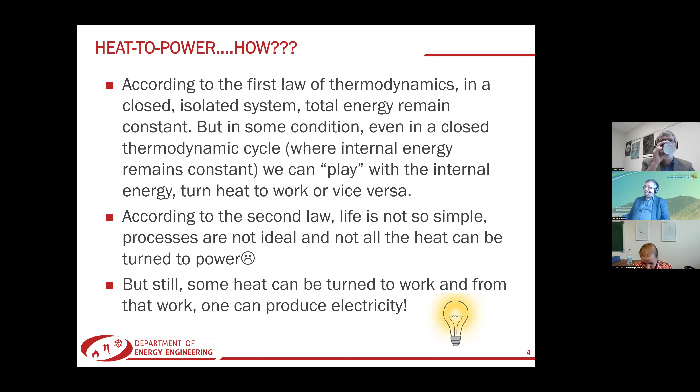Usually I tell my students that we are very lucky, because from the four laws of thermodynamics, we need only two. According to the first law, we can play with work and heat, because only the internal energy has to be constant in a closed thermodynamic cycle. So we can turn heat to work or work to heat, depending on what we have and what we want. But the bad boy, the second law, says that life is not ideal, so not all the heat can be turned to work.

Therefore, we have to figure out how to turn more and more heat to power. And if we can do it, we can make some electricity, which is very good. When we are using thermodynamic cycles, the best way to do it is by using temperature-specific entropy diagrams, because it's a very easy way to calculate the heat.

In this figure, you can see the traditional Carnot cycle. Carnot cycle has 4 steps. It's a gas cycle. First, we have a compression cycle. During the compression, the gas temperature will increase. If it's fast enough, then we can do it adiabatically, so the entropy is more or less constant.

Then we are reaching a high temperature, high pressure state when we are adding heat to the system. But for some reason, Carnot decided that it should be done in an isothermal way, so heat addition without temperature change. After adding a sufficient amount of heat, we can turn some part of this heat to work using an expansion device. The expansion device will expand the hot, high pressure gas, and we will have cold, low pressure gas, but there will be some remaining heat in the system, which has to be removed. So this unused heat has to be removed from the system by a cooler.

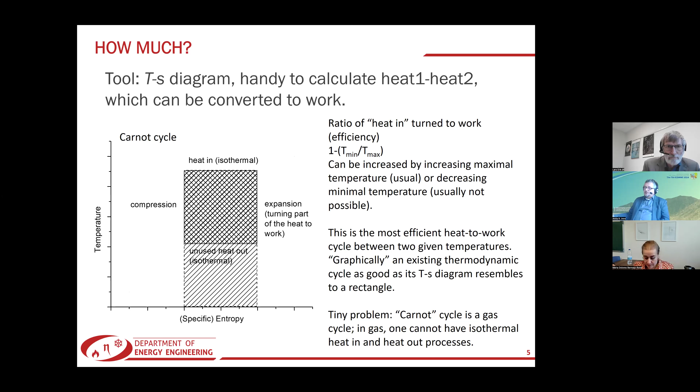But it also showed us that the best way, the highest efficiency, would be to use some thermodynamic cycle which graphically resembles a rectangle. It's very easy because even if you draw some crazy thermodynamic cycle, you can easily see whether it's rectangular or not. The Carnot cycle would be perfect, but the problem is that in a gas cycle, to achieve isothermal heat addition is quite difficult.

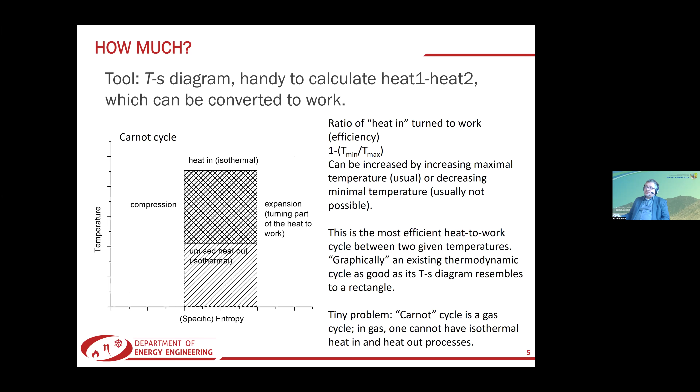Let's say it's more or less impossible. Therefore, we have to figure out something. Let's keep the working fluid as the gas. What can you do with a gas? Of course, you can do adiabatic compression and adiabatic expansion, but the most simple way for heating or cooling would be an isobaric way.

So therefore, the easiest gas cycle would look like this one: first, adiabatic compression, then an isobaric heating, then an adiabatic expansion, then the isobaric cooling. This is the so-called Joule-Brayton cycle, specifically the closed one, which is using external heating.

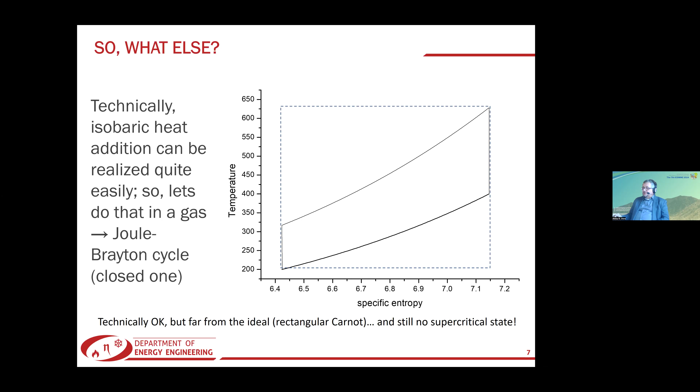If we put this Carnot rectangle around it, we will see that the rectangle is much bigger. The area within the Joule-Brayton cycle is no more than 30% of the total rectangle area. It means that we are not utilizing all the heat that we could. And well, we should do something about it.

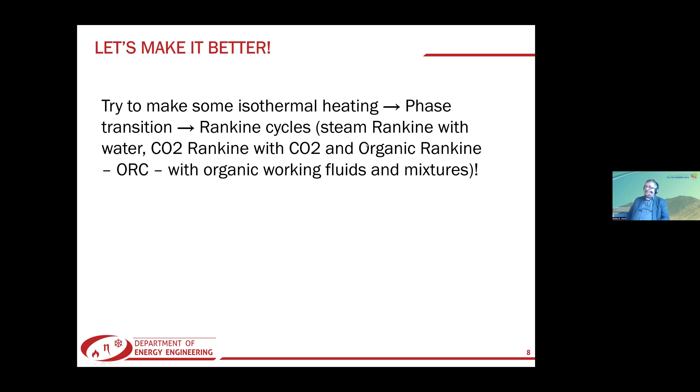We have to figure out how to make isothermal heating. And of course, you can make isothermal heating if you try to use some phase transition in your system. So you have to use some liquid working fluid, which is liquid at low temperature, heat it up to get steam or vapor. With the phase transition, you can get isothermal heating parts and isothermal cooling parts. This is the so-called Rankine cycle.

The traditional power plants are using the steam Rankine cycle. There's also some carbon dioxide Rankine and the organic Rankine cycles, which are using various organic fluids.

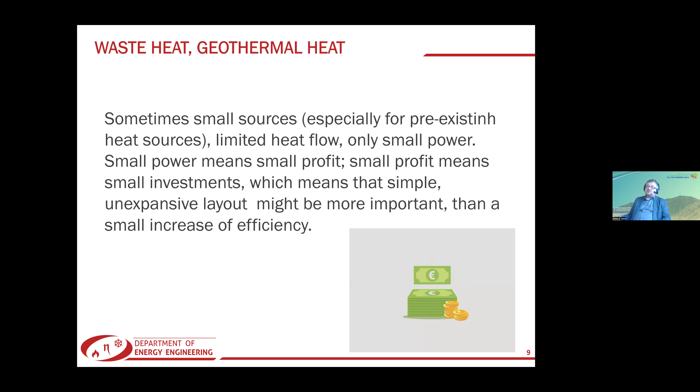There is an additional problem. It is especially serious when you are using the so-called pre-existing heat sources, which is waste heat or geothermal heat or whatever, because in a nuclear power plant you have plenty of heat. But in a geothermal well, you have only a small amount of heat, which means that from a small amount of heat, you can generate only small power, small profit. Small profit means that you have to make your investment on a very low level.

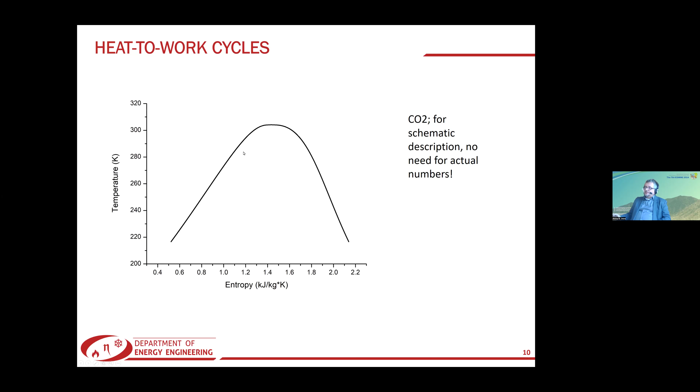It means that your device, which will realize the thermodynamic cycle, has to be as simple as possible. Let's see this carbon dioxide TS diagram - let's make it schematic because it's not important that it is carbon dioxide. In the TS diagram, you have the liquid part on the low entropy side, the vapor part on the high entropy side. Below the bell curve, you have the mixed liquid and vapor region. And somewhere up, you have this high pressure supercritical region. Let's try to make ideal cycles in the first step.

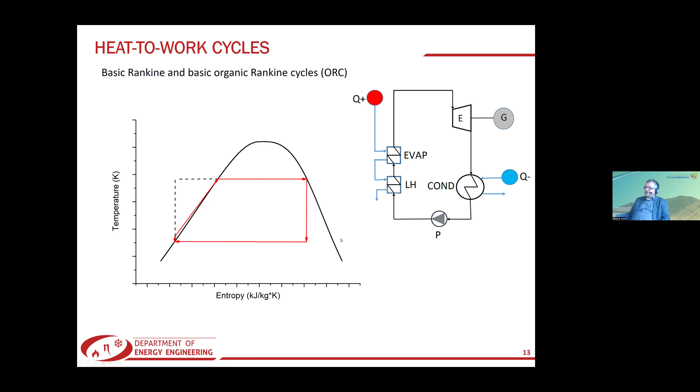Also, I put this Carnot rectangle. You can see that it's quite nice. So it would be a good device, just it seems to be a little bit too expensive.

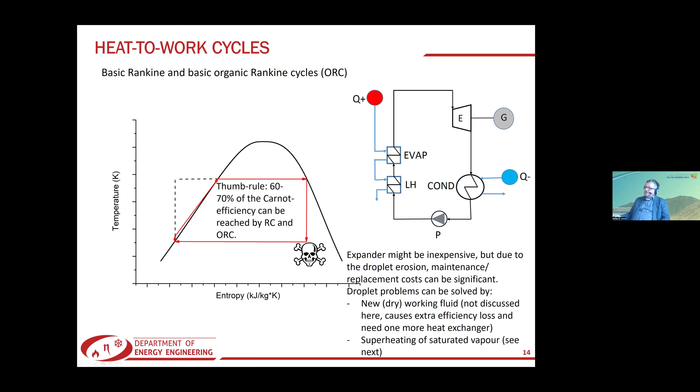There is another problem. I said that upon the expansion, we will end up in the wet vapor region. Wet vapor region has a lot of tiny droplets, and the tiny droplets have quite big speed. And if, for example, you are using a traditional expander, which is a turbine, then the turbine blades will be damaged by these droplets.

Therefore, it's not so good to use this kind of expansion. What can we do? We can simply superheat the whole system. So instead of starting the expansion in the saturated vapor state, we can heat up the system. Pressure is still not so high. Temperature is already quite high. And you need a third heat exchanger, because in this case, you are heating up a vapor, pure vapor, so there will be no phase transition like in the evaporator, and therefore it has to be a different device. So even this total system is a little bit more expensive.

And then if you compare this superheated Rankine cycle with the big rectangle, because now we have to draw the rectangles always at the maximal and minimal temperature, you can see that the efficiency compared to the potentially best Carnot efficiency is even smaller. So we are on the wrong side. And also we have to make an inventory.

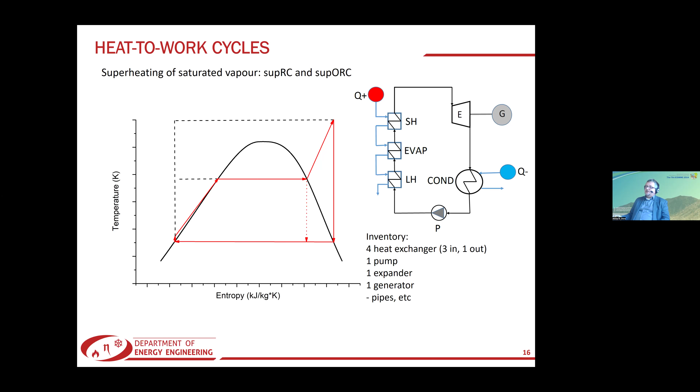We have 4 heat exchangers, 1 pump, 1 expander, 1 generator, and a lot of pipes. We have to remember this, because in energy engineering, it's not the kilowatts or kilowatt-hours that are the most important, but the price, unfortunately.

So here are the problems. Heat exchangers are expensive, pumps have self-consumption. Also, there is something called boiling crisis. It can happen in the evaporator, that on the cold liquid side there will be bubble formation on the hot surface of the heat exchanger, and sometimes the bubbles will not be able to move away, so they form a more or less compact vapor film on the surface of the heat exchanger. Then the heat exchange between the cold and hot liquid will deteriorate, and sometimes it can even cause a steam explosion because there will be some overheating on one side.

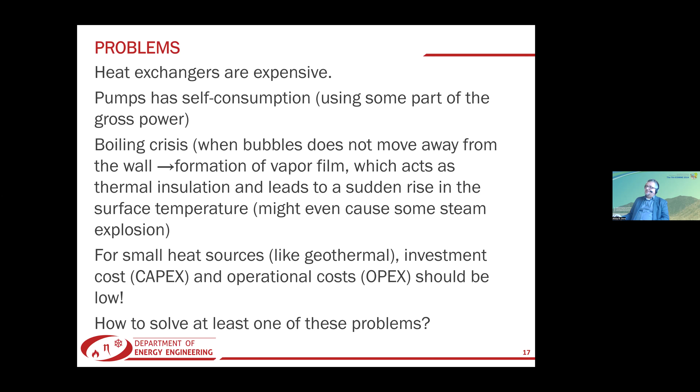Also, as I mentioned, if you have a small heat source, then the investment cost and operational cost should be as low as possible. So we have these problems, they have to be solved, and we have to solve it in high pressure supercritical fluids. The reason is that this is a high pressure meeting, so we always have to find a proper solution which fits into the audience.

So what can we do with supercritical fluids? There is something called transcritical Rankine cycles. You might remember that in traditional Rankine cycles, we had a short compression line, and then we heat it up, and upon heating, the liquid state reached the evaporation state. If we are using bigger compression, then we can go above the critical pressure.

Then by heating the high pressure liquid-like fluid, when the pressure is higher than the critical pressure, you might have heating without boiling. So here it will be some liquid-like, some vapor-like, but technically there will be no boiling, no bubbles. So you solved a lot of problems, because in this case you have to use only one heat exchanger. Well, it has to be more sophisticated than the previous one, but it's still only one instead of three. And you also solved the boiling crisis.

Of course, there might be some other problems. From transcritical Rankine cycles, industry is using more or less only 3 different fluids. Water is used in traditional fossil fuel supercritical power plants. There are several all around the world. Also, there are some plans to build similar nuclear power plants. It is called a 4th generation supercritical water reactor. It will run between 23 and 25 megapascal.

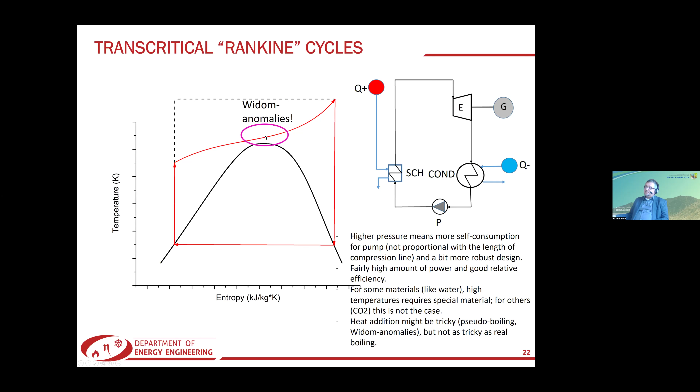The problem is that we will have the so-called Widom anomalies close to the critical point when we are heating up the system at supercritical pressure. What does it mean that we have these Widom anomalies? It means that in supercritical fluids close to the critical point, some of the transport properties might be extremely high. And when you have the combination of these extremely high or extremely low quantities, for example the constant pressure heat capacity, then there can be two different problems, the so-called deteriorated or enhanced heat transfer.

In one case, you cannot remove all the heat you want, and in the other case, you will remove too much heat. The deteriorated case is the bigger problem, because if you cannot remove the heat you want to, for example in a supercritical nuclear power plant, then it might cause a huge accident. And therefore, in supercritical power plants, you have to know exactly the thermal properties.

I said that supercritical nuclear power plants will run at 23 or 25 megapascal, but this pressure will be reached by a pump. And when you are using the pump, the pressure is not exactly 23, there will always be some fluctuation around the pressure. This fluctuation can be even 0.1 bar, so 0.01 megapascal.

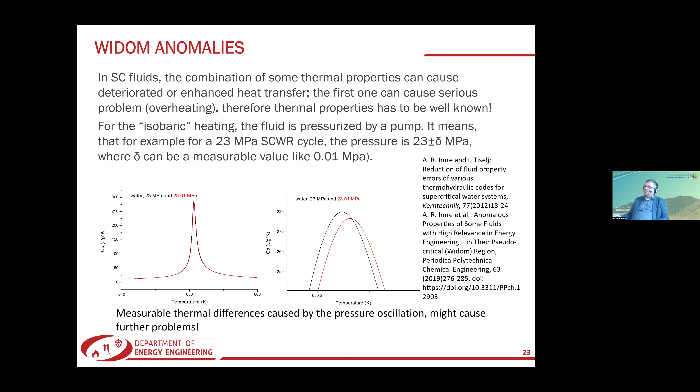And it means that because in the Widom region, these transport thermal properties are very sensitive to the actual pressure, you can have even 2 or 3% differences between them. And it might mean that you just calculated that everything will be okay, but no, because the CP is a little bit higher and you will have deteriorated heat transfer.

It will be very difficult to make very exact calculations for a supercritical power plant, but we have to solve it somehow. Inventory-wise, for both systems, the traditional Rankine or the transcritical Rankine, we still need one pump, one expander, one generator.

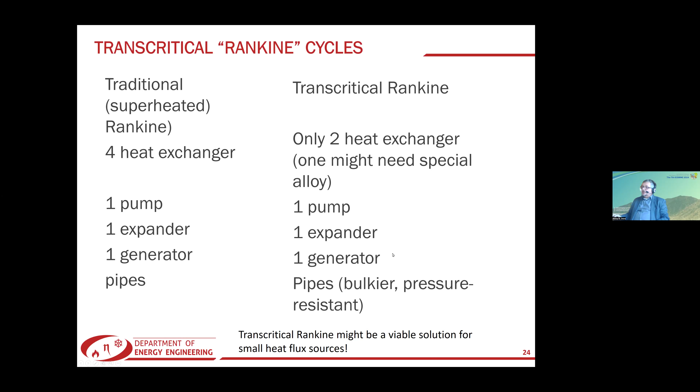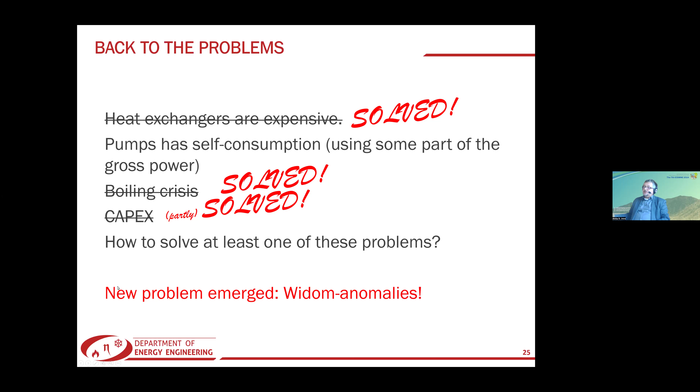Concerning the pipes, the transcritical Rankine cycle is called transcritical because the cooling part is subcritical while the heating part is supercritical. The pipes should be much bulkier because of higher pressure, and we need only two heat exchangers, one for heat addition and one for heat removal. So we solved one problem associated with heat exchange, we solved the boiling crisis problem, and at least partly we solved the investment problem, but we have a new problem with Widom anomalies.

What can be done? In a geothermal power plant, there is a very nice and tricky version. How can you solve the problem associated with the pump? They say, let's put the first heat exchanger, the one making evaporation, below the earth. Not just 10 meters, but 500, 600 meters, down to the geothermal environment, or even to 1 kilometer.

The heating will be done there, and the pressure will be high, not because any pump is used, but simply because the working fluid, which is condensed on the surface by air cooling, turns back to liquid, and the hydrostatic pressure of the liquid creates the pressure of the system. Of course, it's very difficult to make a big power plant like this. There are some smaller pilots existing, but there are two problems.

First, if you want to utilize most of the work coming out from the expander, you have to put the turbine and also the generator very close, meaning the turbine, generator, and evaporator have to be underground at 1 kilometer depth. It's an expensive way. Alternatively, you can put the turbine and generator at the surface, but then you'll have a huge pressure drop between the evaporator and the surface, and also a temperature drop, and the efficiency will be much lower.

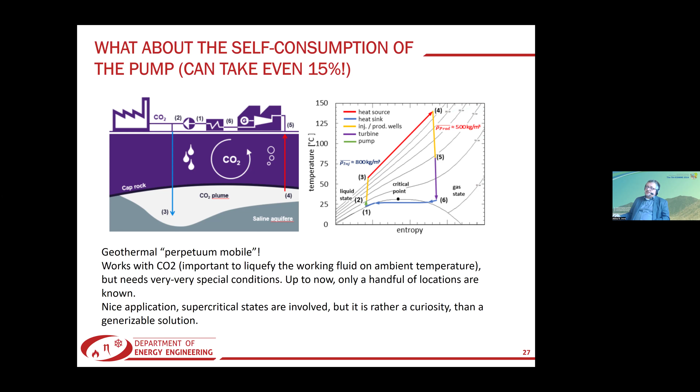The only problem is finding a good location where this thermodynamic perpetuum mobile cycle can work, which is very difficult. As far as I know, there are presently fewer than 10 locations known around the world, and one of them is in Hungary, in Zala County. They already had a one month long cycle, where the carbon dioxide was constantly running around, and it generated something like 200 to 300 kilowatts, which is not a nuclear power plant, but it's a quite nice number.

So here we also have carbon dioxide in a supercritical state, which is high pressure, but not extremely high pressure. In this way, the pump problem can be solved, but the investment cost will be extremely high, so this is not the best solution.

Therefore, coming to the last part, what can we do to have a very simple thermodynamic cycle, a bare-bone thermodynamic cycle, which can turn heat into work? First we have to investigate what are the necessary steps for the power cycle. Because we are converting heat to power, we need a heat exchanger for heating, and we need an expander to turn part of the heat into work.

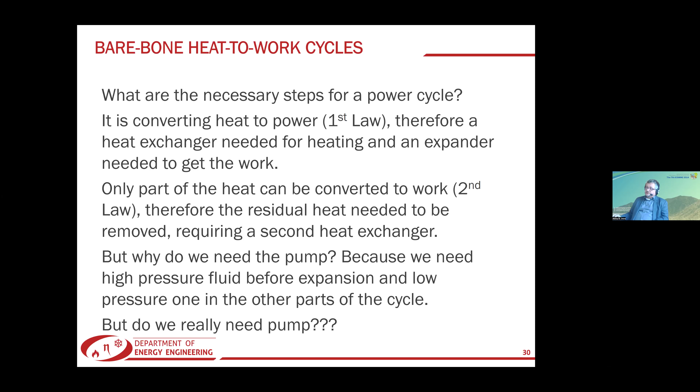We also need a second heat exchanger because only part of the heat will be turned to work, so the leftover has to be removed. But actually, we do not need the pump. Technically, we need high pressure because high pressure is needed to drive the turbine somehow. But why do we need a pump? Can we make high pressure without a pump? Of course we can, and let's see how.

Let's have a temperature entropy diagram just for gas. We have an initial state of the fluid: a low temperature, low entropy gas, and we can heat it up in two different ways, either isobaric or isochoric. Isobaric and isochoric heating is very different.

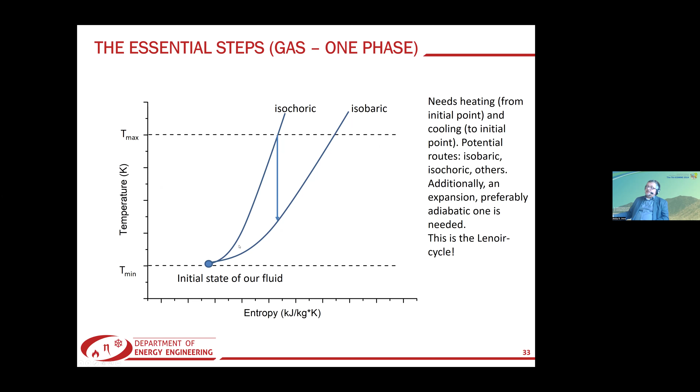Let's say we are using isochoric heating, and when we reach the maximal temperature provided by, for example, the geothermal well, then we simply make an expansion. In this way we have a so-called trilateral cycle: isochoric heating, adiabatic expansion, and then isobaric cooling. This is the so-called Lenoir cycle.

Lenoir cycle is not very good. If you compare it with this Carnot rectangle, you can see that it's really, really bad. Sometimes the Lenoir cycle is still used with internal combustion engines, but only for cheaper devices like lawn mowers.

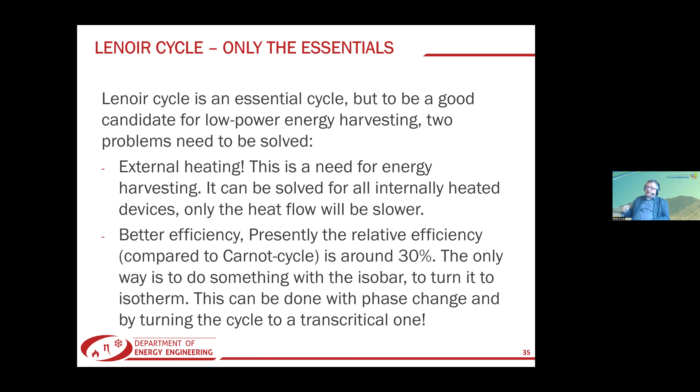What can we do? How can we make the Lenoir cycle better? For example, the first step is that we have to run it with external heating because we have to utilize geothermal heat. And then we also have to make better efficiency. Better efficiency can be achieved if we make one of the cooling steps isothermal, which means we have to do a transcritical cycle.

This is carbon dioxide. First, let's see the black one. We have isochoric heating, adiabatic expansion, then isobaric and isothermal cooling. We had a nice triangular cycle. If you compare it with a rectangle, you can see that it's almost half, so it's not bad.

The problem is that if you are using these numbers, the highest pressure of the system will be 277 megapascal. For your community, it's not big, but for an energy engineer it's extremely big, because even the very high pressure power plants have a maximum of some 20-something megapascal. So it's 10 times higher than what can be reached in industry.

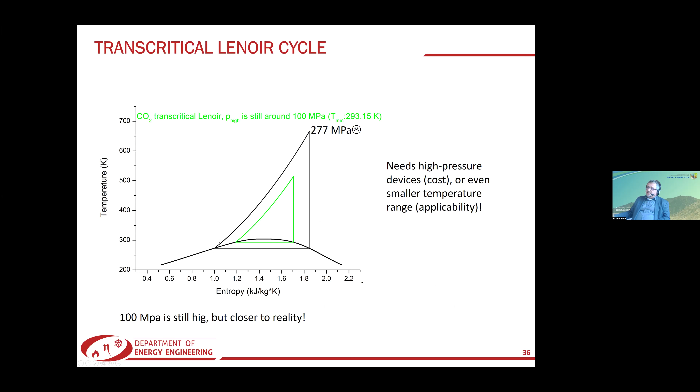And even if you make a smaller triangle, it's still 100 megapascal, so it's still quite high. There are some problems. First, in the market we have a lot of isobaric heat exchangers, but only a very few isochoric ones, which means the prices of isochoric heat exchangers are quite big.

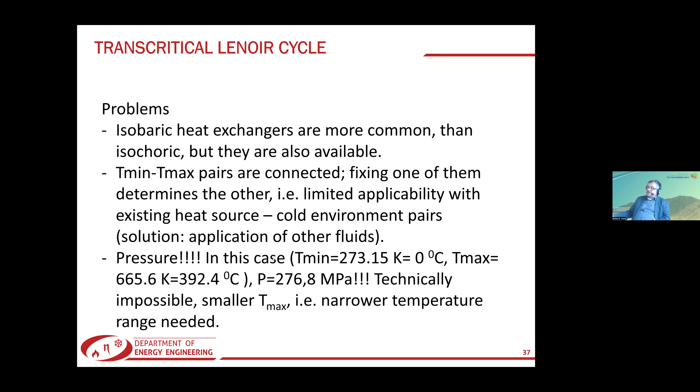As you see here, upper and lower temperature pairs are always connected. So if you have one lower temperature, which means, for example, air temperature, then you can utilize only one high temperature source. If you have another high temperature source, then you will need a different cycle. Pressures are high, as you said, it's a very, very big problem.

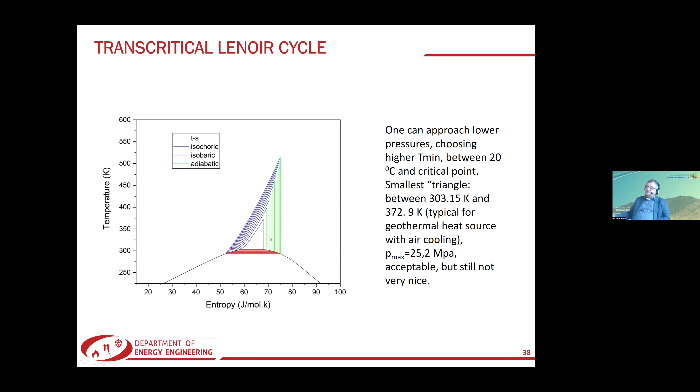Even if you go down, we still have high pressure. Here I have a lot of different triangles, and the smallest one inside is a triangle between 303 and 373 Kelvin. It's very good for a low temperature geothermal well with air cooling, and the pressure is 25 megapascals, so it's at the limit of our potentials. But as you can see, because this triangle is quite small, the power will also be quite small.

We can compare the maximum and minimum temperature pairs. So if you have a geothermal well and you know that the geothermal well temperature is 350, then you have to find a cooling material which can cool it down to 303 Kelvin, and you have to do it potentially at low pressure.

But how can we make the pressure lower? In this case, the second law helps us, because the second law is talking about entropy and all the bad things of the world. It also means that there is no such thing as an ideal isochoric or ideal adiabatic process.

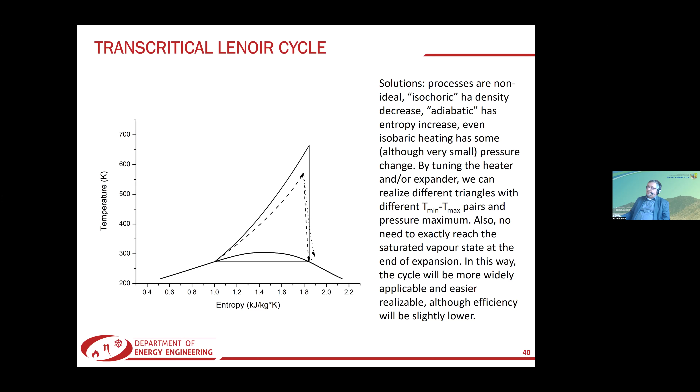It means that if I choose properly my quasi-isochoric heating device or my expander, then I can choose the location of this upper point. This can be here, or even here. So I can utilize more and more temperature, more and more heat sources.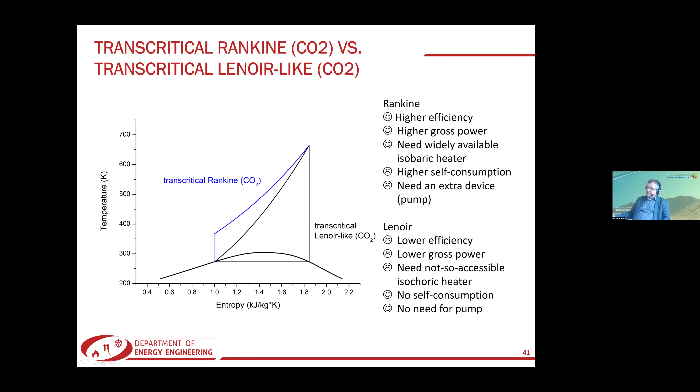At the very end, I hope I still have a few minutes, I just compared the traditional transcritical Rankine cycle, which is also not bad, but has high self-consumption and needs a lot of extra devices, with the Lenoir cycle, which does not have self-consumption and no need for a pump, but has lower efficiency, lower gross power, and also needs an isochoric heater.

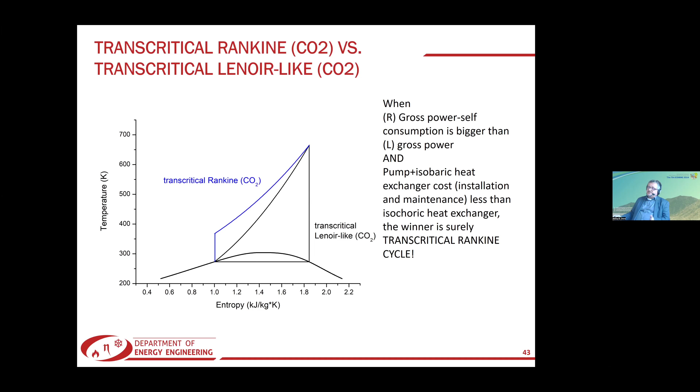So every time you have a heat source, you have to compare the gross power produced by the potential transcritical Rankine and the transcritical Lenoir cycle, and depending on the gross power and the self-consumption, you can decide whether the Rankine or Lenoir cycle would be best. There are occasions when one is good, other occasions the other, but often you have to make very detailed financial calculations to determine which would be best.

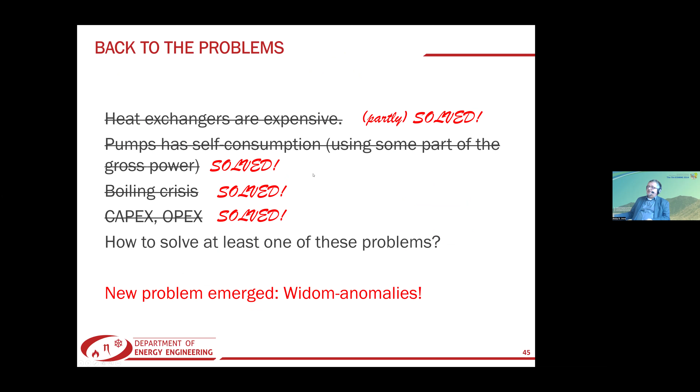With this Lenoir problem, well, we solved almost everything. The heat exchanger is still a little too expensive because we need a special one, and of course we have to handle the Widom anomalies somehow. But it still means that the Lenoir cycle with external heating and transcritical cycle can be a good solution for geothermal and industrial waste heat sources. We can make a few hundred kilowatts, not a few thousand megawatts, but that few hundred kilowatts can be used on spot, so there would be no transport cost for the electricity. It can be a good solution for a sustainable future. Thank you for your attention.

Thank you very much, Attila. It was really exciting. It's great that we are having presentations from different fields and from energy engineering. I'm not sure if it's really something we are all familiar with. We have one question so far, if you allow me to read it.

Do you think that thermal energy can reach significant amounts to contribute to the elimination of fossil fuels? Can you compare geothermal with solar, wind, and water in terms of future alternatives to fossils?

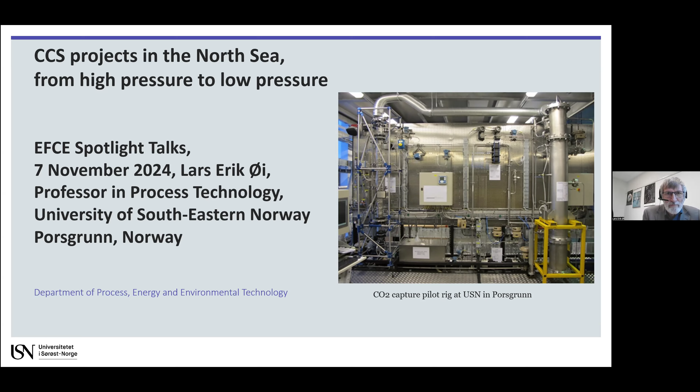We have an absorption column to the left and a stripping column to the right. The absorption is at atmospheric pressure, and the stripping is performed at 2 to 3 bars using steam—low pressure steam—to heat the stripping process. The absorption can be from 1 atmosphere up to 100 atmospheres.

First, a little about CO2 capture and storage technology, and then just a little about the need for CCS. I tried to go a little through the history of early high pressure applications, and that is carbon capture from natural gas. This is by nature cheaper due to no pressurization and also to slim columns. And then I will turn to today's atmospheric applications.

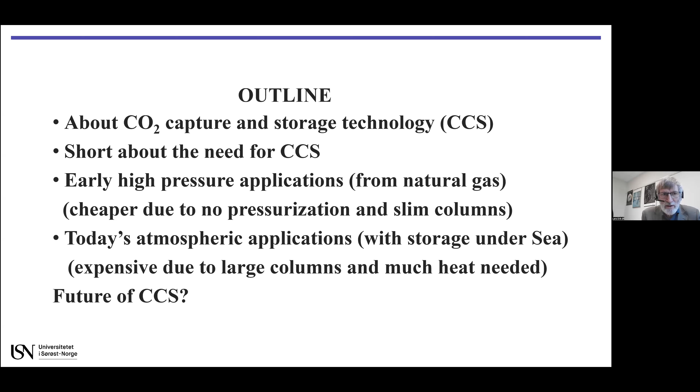We have a large project going on with storage under the North Sea. These atmospheric applications are expensive due to several things, but typically very large and expensive columns and much heat needed. And then I will end with a little about the future of CCS.

A little about the technology—I will only go through CCS by absorption in amine solvents. Again, this process can be performed at a high or a low pressure in the absorber. I guess most of you have seen the outline of this process before, and from a chemical engineering point of view, it's perhaps one of the most common processes, with absorption followed by desorption or stripping.

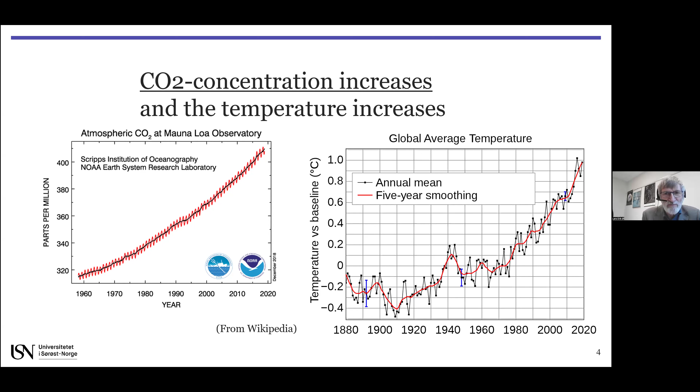About the climate, I will only state that the CO2 concentration in the atmosphere increases and the temperature increases. We are soon approaching 1.5 degrees heating, and then we have a political international agreement with an aim to limit the heating to 2 degrees. This is an old curve.

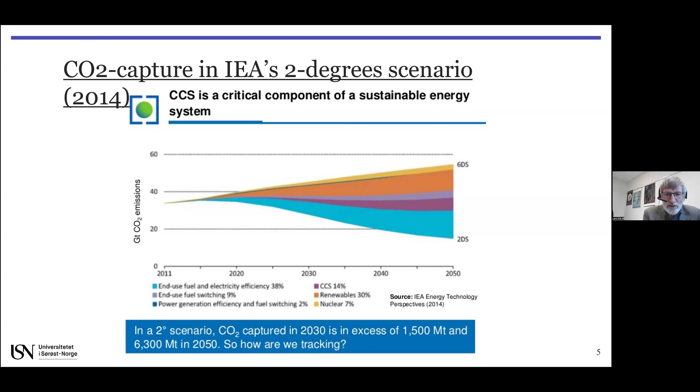It is indicated here that CCS will stand for 14% of the remedy. If we look at the timeline, we are now in 2024, and now we have to start with large-scale CCS applications to reach the 2 degrees level limitation. I'm afraid that we are late, but from the process engineer side, we definitely have a challenge here, and we want to take the challenge. I think that CCS will have an important part in the limitations of the temperature increase.

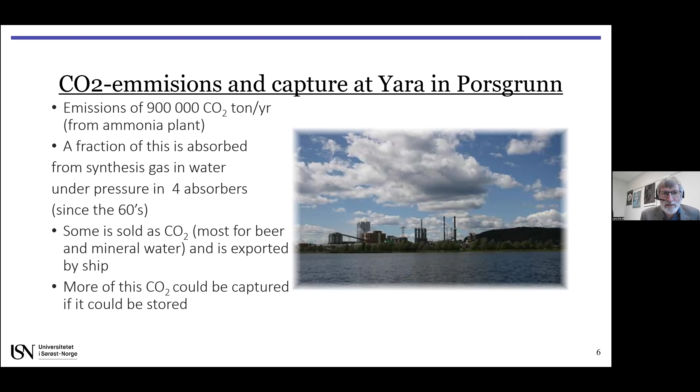In the 60s, this CO2 was exported, and some is sold as CO2, mostly for beer and mineral water. There has been a long-lasting export on ship. More of this CO2 could be captured if it could be stored.

Then we go out to the North Sea, and this is about CO2 capture at the Sleipner field. The process of processing the natural gas is performed at about 60 bar on the top of the platform. This is below the reservoir pressure and above the pipeline pressure. This process has been performed since 1996.

The reason why they removed this CO2 was due to 2 things. One thing was to reduce the unnecessary transport of CO2 to the European continent, and partly to reduce the CO2 tax. In this project, CO2 is stored, actually about 25 million tons until now, in a formation with salt water, an aquifer. That is a layer between the ocean bottom and the Sleipner oil and gas field.

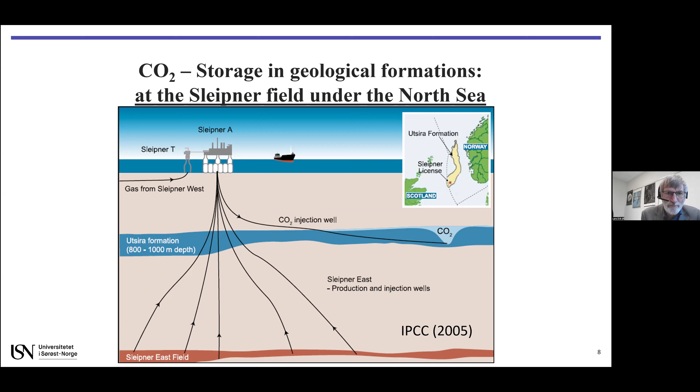And on the picture, where we have Norway and Scotland on the other side, we have a large formation where we have possible places to store the CO2.

In Norway, similar things are done at the Melkøya LNG plant that is near Hammerfest in northern Norway. I think I have taken this picture, and I think it's fascinating that the size of Hammerfest city center, that is closest to us, is the smallest thing, and then the coastal ship is bigger than the city center, and behind in the picture we have the LNG plant, which is much larger than the town of Hammerfest.

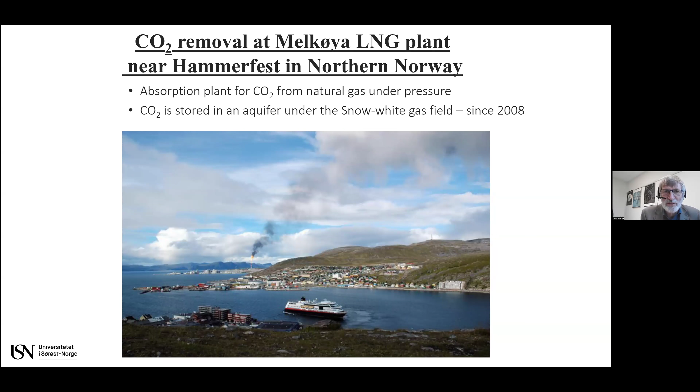At that LNG plant, there is an absorption plant for CO2, where CO2 is removed under pressure, and then the CO2 is sent back and stored in an aquifer, or salt water layer, under this Snøhvit gas field where the gas comes from. This has been in operation since 2008.

Then we turn to atmospheric pressure. It is in a way more difficult or more costly to capture CO2 from atmospheric exhaust. One of the first places they did that at large scale was in Saskatchewan, Canada. The place is called Boundary Dam. This was the first large-scale example of CO2 capture from a coal-based power plant, and Cansolv was the technology.

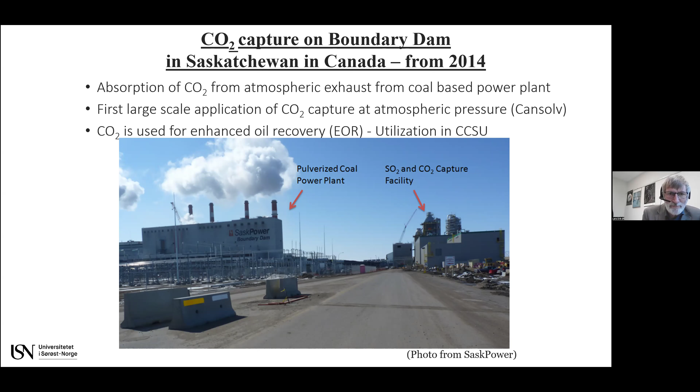This could be done because the CO2 is used for enhanced oil recovery, EOR, meaning that they could get some return on the money spent for EOR utilization of the CO2. We have the coal power plant to the left, and we have the CO2 capture facility to the right, and then we have a feeling of how large these columns, the CO2 capture columns, have to be.

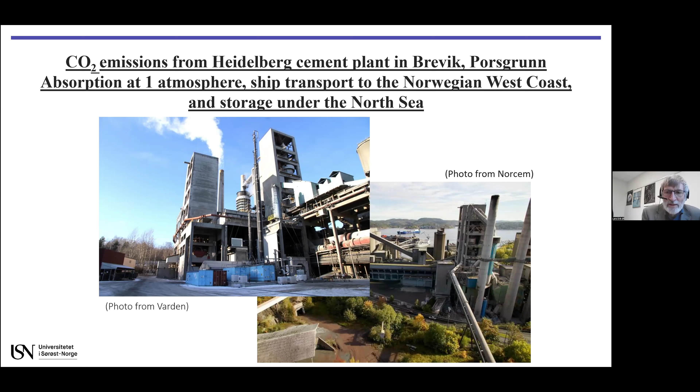Now we return to Norway, and this is also in Porsgrunn, where our university is located. Here we have a cement plant within the Heidelberg group, and now they are building the CO2 capture plant with absorption at 1 atmosphere. The plan is to have ship transport to the Norwegian west coast and then storage under the North Sea.

Then we have other CO2 emitters close to us. This is a waste combustion plant at Klemetsrud in Oslo, and there is a plan to capture the CO2 from here and bring it to the west coast.

And there is also CO2 capture in a large test center, Mongstad. This test site is close to Bergen, and it is close to where the storage of the CO2 in the North Sea has its land-based facility.

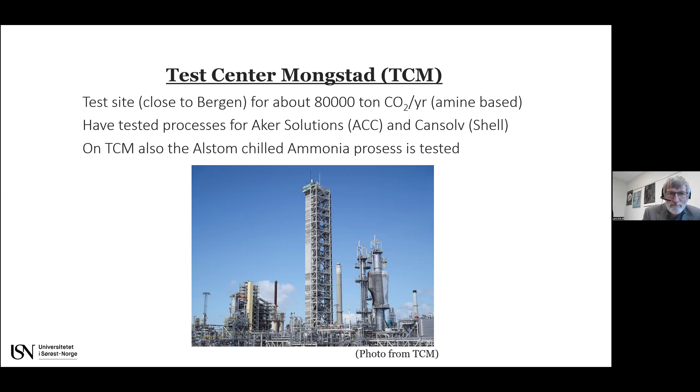At this test center, with this large absorption column that is 60 meters high, they have tested processes for Aker Solutions and Cansolv. These are two of the commercial processes for CO2 capture at atmospheric pressure, and also other processes like the Alstom chilled ammonia process is tested here.

And then I go for the conclusions. That is a sort of discussion about carbon capture and storage cost. The cost of CCS is in the order of magnitude 50 to 200 euro per ton CO2. This depends on several factors.

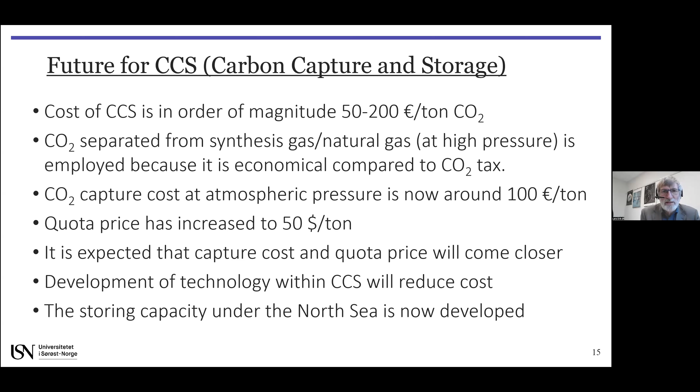And the storing capacity under the North Sea is now developed. There are quite a lot of contracts set now where companies on the European continent make plans to transport CO2 to be stored under the North Sea. So that was my presentation. Thank you.

Thank you very much. It was really great to see all these industrial large-scale applications and plans you shared, and also this last slide about economics. I think it's really something special, so we don't really see it that much. Our first question arrived, and I ask everyone in the audience to share their questions in the question and answers button, because then we can see it and answer it.

The first question is: is capturing existing CO2 already in the atmosphere an issue under discussion?

I will say yes, because what we call direct air capture is definitely a hot research activity. However, we can divide CO2 capture from the atmosphere into two. The first is the natural one. We could, for instance, feed more trees and make available areas for plants, and typically a forest, to absorb more CO2, and then that is a sort of capture.

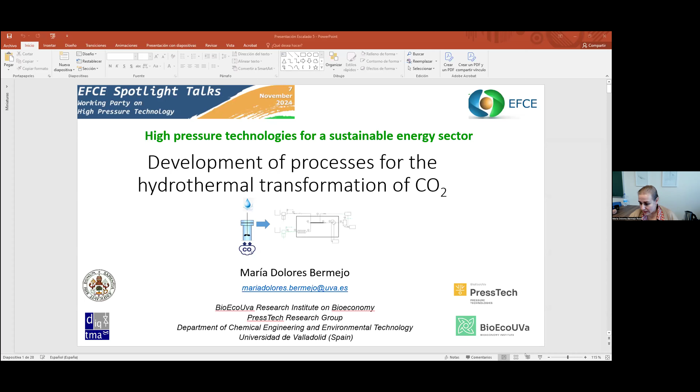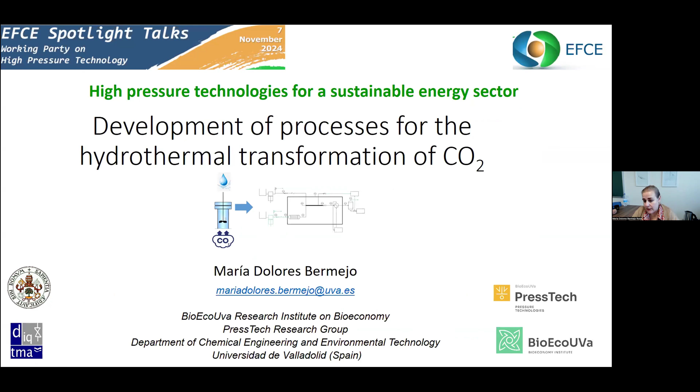Thank you, Erik. I'm going to thank first to be invited to this interesting colloquio, to chat. And I'm going to talk about the processes for transforming CO2 into something concrete: formic acid.

It has been mentioned that with the Paris Agreement, the objective was to avoid increasing the temperature of the air more than 2 degrees C. For doing that, several actions are taken, and one of the main ones is to stop using fossil fuels.

What happens in the future? Ideally, fossil fuels will not be used, but there will still be CO2 sources. For example, biogas contains CO2, other biological processes produce CO2, and also burning biomass produces CO2 that can still be captured and used as raw matter.

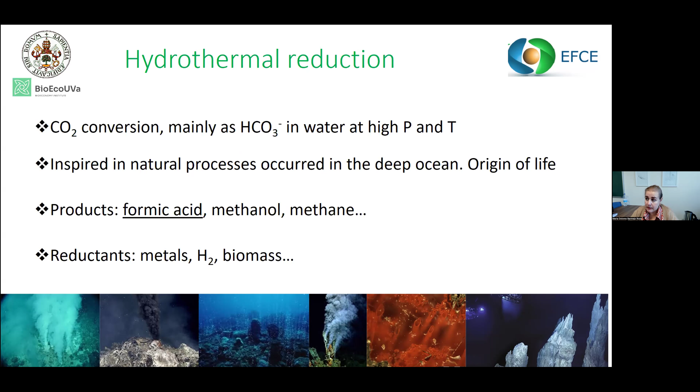In this process, the main product obtained is formic acid, but with the appropriate reaction time and catalyst, other products such as methanol or methane could be obtained. As reductant, metals, hydrogen, or biomass can be used.

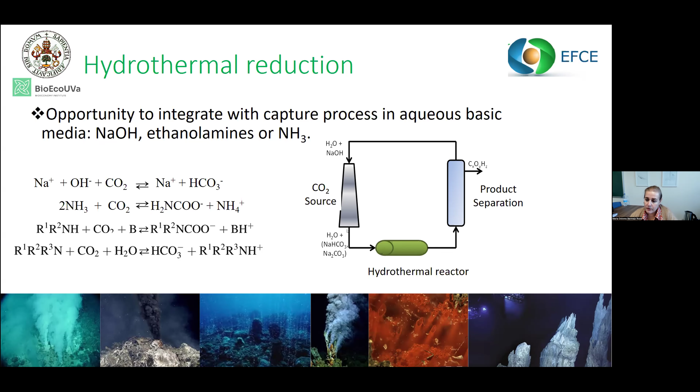An important advantage of this process is that we just capture the CO2 by absorption with sodium hydroxide, amines, or even ammonia. This CO2 dissolved in basic solution can be directly taken to the hydrothermal reactor without separating or purifying the CO2, and then after the reaction we have directly the product, so we don't need an intermediate purification or compression step.

This could be compared to a conventional carbon capture process from amines. We have an absorber, a desorber, and then we have to recover the amine employing high pressure or high temperature steam, and have a compression step to send the CO2 to storage.

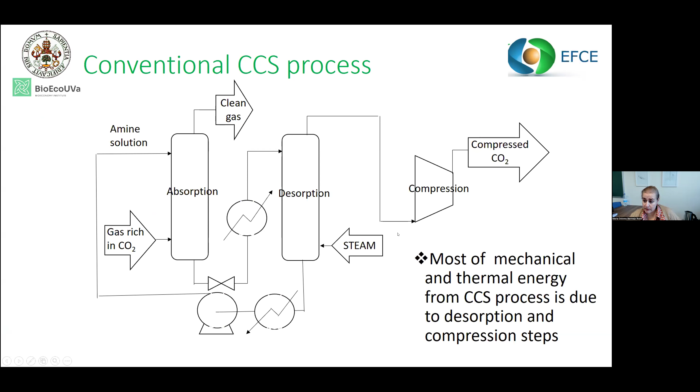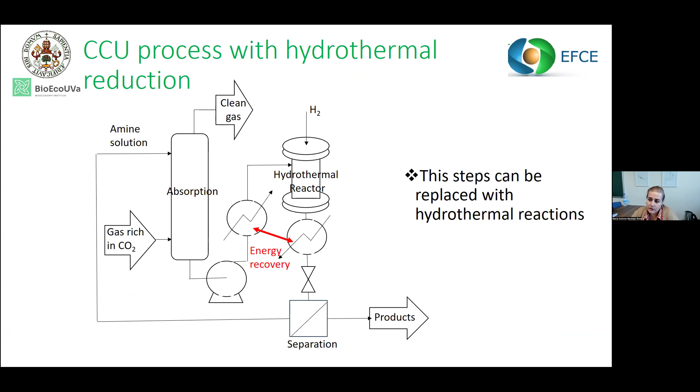By integrating this absorption process with hydrothermal reaction, we substitute the most energy consuming equipment with hydrothermal reaction, and energy could be integrated elsewhere, but we have directly products that can be liquid and easily used or transported.

The objective of our research this last year has been to study the different processes of reduction of CO2 capture in basic media in order to achieve its scale up. We can have the CO2 as carbamate or bicarbonate in ethanolamines, bicarbonate, or using ammonia solution as capture solvent, and the reductant could be biomass, metals, or hydrogen.

First, I will explain our results using biomass. When we began our research, there were previous results in which CO2 was reduced in aqueous medium at high pressure and temperature around 300 degrees, using a reductant like glycerin or isopropyl alcohol. In the literature, it was explained that these alcohol groups were responsible for the reduction.

So we thought: lignocellulosic biomass can be transformed in high temperature water, in hydrothermal media, and after decomposition of these products, we have hemicellulose that is dissolved around 150-230 degrees, cellulose that is dissolved at temperatures higher than 250, and lignin that is partially dissolved. It has aromatic groups, but these two fractions have a lot of alcoholic groups.

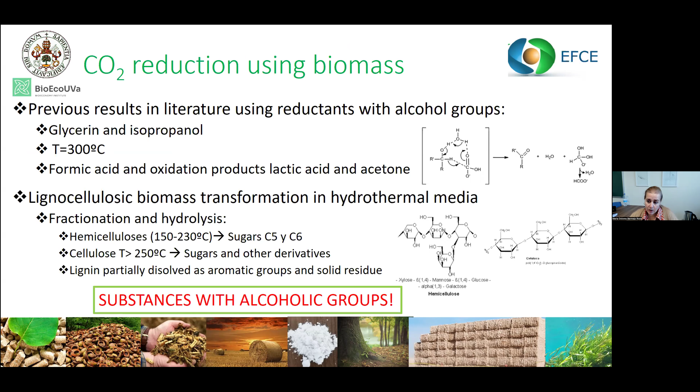So this substance - sugars, alcohols, polyalcohols, aldehydes with alcohol groups - are in theory susceptible to producing the reduction of CO2. So for testing, what we did was make extensive experiments with a lot of substances that could potentially be derived from biomass, at 300 degrees and 150 minutes in batch reactors. Very simple experiments, but a lot of them. And we tested a lot of substances.

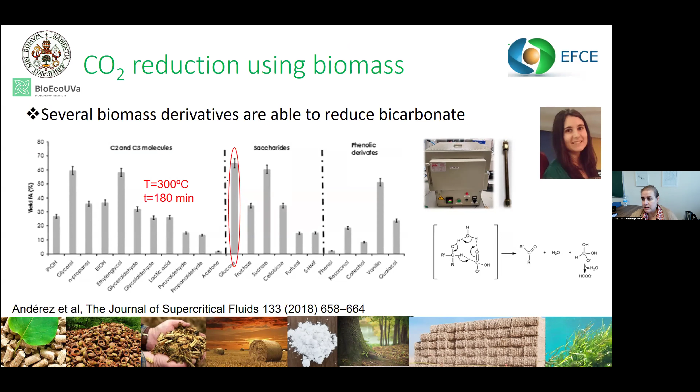Almost all of them, except for acetone and phenol, were able to give formic acid from the bicarbonate. The one with higher yield was glucose. So we dug deeper into these results and made further experiments with glucose, which is normally used as a model compound of lignocellulosic biomass.

So we made experiments. We know that the formic acid could come from bicarbonate, but also from biomass. So we made experiments using bicarbonate with labeled carbon in order to detect the origin of this formic acid.

After the experiment, we saw in the black dots the total formic acid, and in the white dots the formic acid coming from bicarbonate, from marked bicarbonate. We can see that with reaction time in batch, this amount is increasing. This means that this reaction of reducing CO2 is slower than the reaction forming formic acid from biomass, and that at the end, more or less half of the formic acid is coming from biomass and half is coming from the bicarbonate.

This is good because with reaction from biomass, it is normal that a lot of different products appear. So in this way, we are also improving the selectivity of the other part of the reductant, that is oxidized. We checked that this amount of formic acid coming from the CO2, from the bicarbonate, was increasing with temperature.

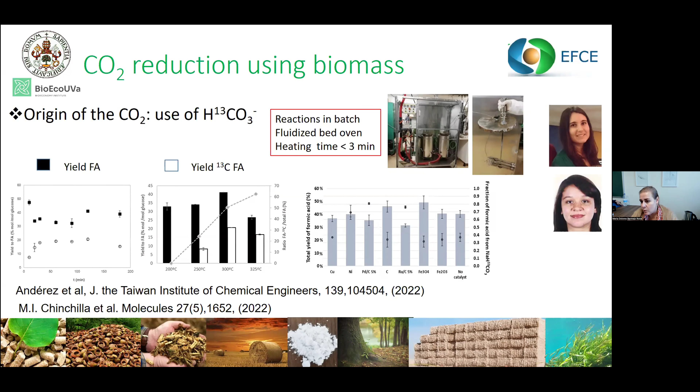The maximum is at 300 degrees because at higher temperatures the formic acid begins to decompose. We also tested several catalysts, and we observed that some of them were improving the total amount of formic acid, and some of them were improving the proportion of formic acid coming from CO2, shown by the dots. So we can have catalysts that influence one or the other of the two simultaneous processes that are happening.

So we scaled up the process for glucose in a pilot plant with 2 kilograms per hour of solution. We have a depressurization valve, so we can work with very short residence times. We found that from very low residence times, even of seconds, we can have high yields of formic acid, and that from the beginning, from 10 minutes - that was the first experiment we made, using marked bicarbonate - we could have important yields of formic acid coming from CO2.

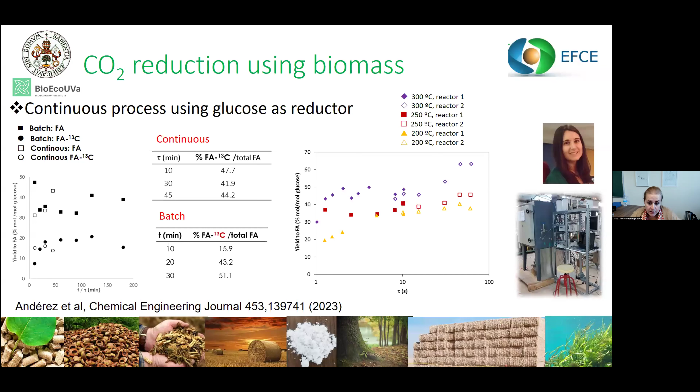This is explained by the best operational conditions in continuous mode, where the heating is faster, because at low temperatures the formic acid coming from biomass is favored. So we have promising results. Our next step was testing real biomass.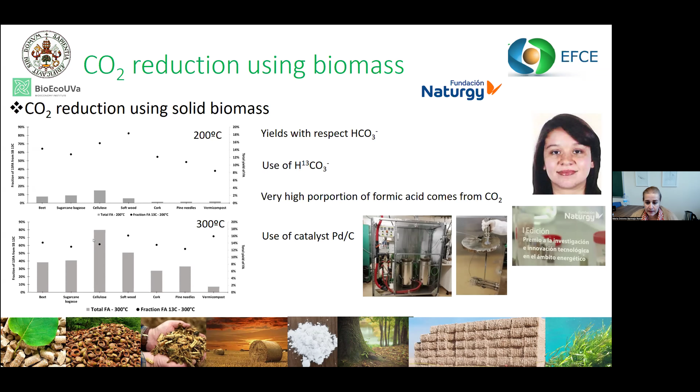So we tested a lot of biomass first in batch with catalysts. The most successful catalyst was palladium over carbon, again over activated carbon. We found that using this catalyst, even at low temperature, we can have an important proportion of formic acid from the bicarbonate, but the total amounts of formic acid were higher at higher temperature, 300 degrees. The most successful biomasses were those with higher contents of cellulose - pure cellulose, then wood and sugarcane bagasse.

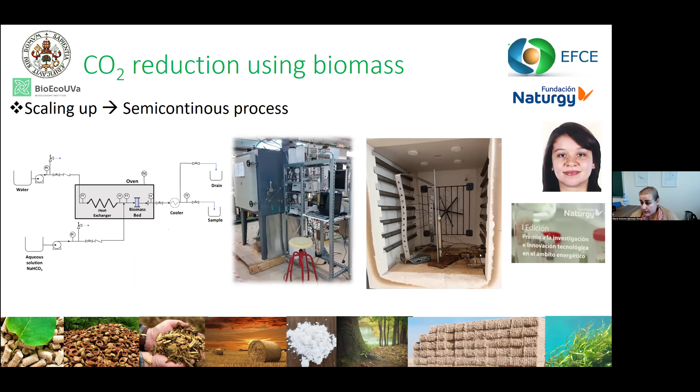So we obtained the Naturgy Award, and with this we were able to scale up the process. First, we made testing with the small semicontinuous process. The process was the same: we heat water and pass it through a vessel full of biomass, through a biomass bed.

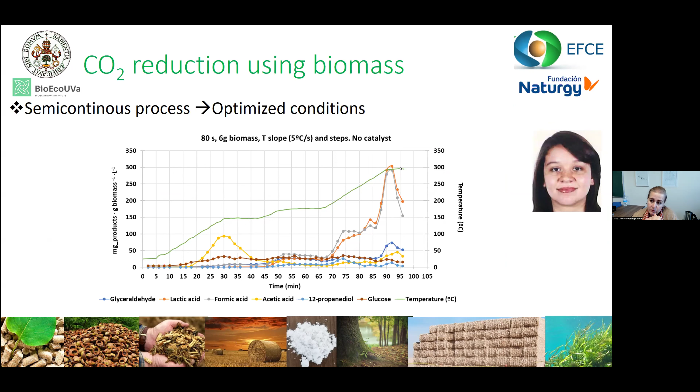We obtained results making experiments at different temperatures - at temperatures around 150 we have important amounts of acetic acid, and at higher temperatures we have peaks of lactic acid and formic acid. So we decided to implement the operation for the bigger pilot plant with a step of operation at 150 and a second step of operation at 300.

We tested this way of operation with several different biomasses - coffee waste, cocoa shell, wood, corn leaves, pistachio shell - all of them lignocellulosic biomass, very different from each other. We observed in most of them the same behavior: first a peak of acetic acid, and then a second peak at 300 degrees of formic and lactic acid.

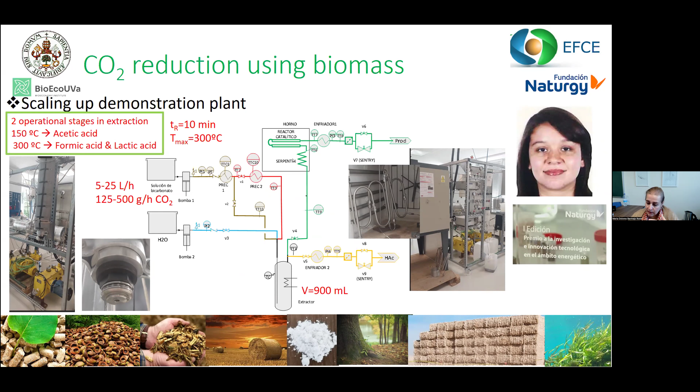So now we are in the process of scaling up the plant. We have a 1 liter reactor. The plant is intended to work between 5 and 25 liters per hour, transforming amounts of CO2 of between 125 and 500 grams per hour. This is ready. We have the pumps, the vessel, the catalytic reactor, and the plant is going to work in 2 steps: a first step working at 150, and a second step working at 300, and the effluent is going to pass through a catalytic reactor to transform the unreacted products to formic acid.

Now I'm going to talk about the second process, using metals and hydrogen. Previous results in literature with bicarbonate show that if we react this bicarbonate in aqueous solution at temperatures of 275, 300 degrees with these metals—aluminum, zinc, iron, or manganese—the metal releases hydrogen, and in situ there was produced the reduction of CO2 to formic acid. This was a very rapid and selective process because the slightly basic medium was able to stabilize the formic acid, and we can have yields of 70% with respect to the bicarbonate in the first minutes of reaction.

So we thought that this process is very nice. We have the problem that we have a waste of the oxidized metal, which of course could be recovered by reduction. And we have also the issue of the high temperature of 300 degrees.

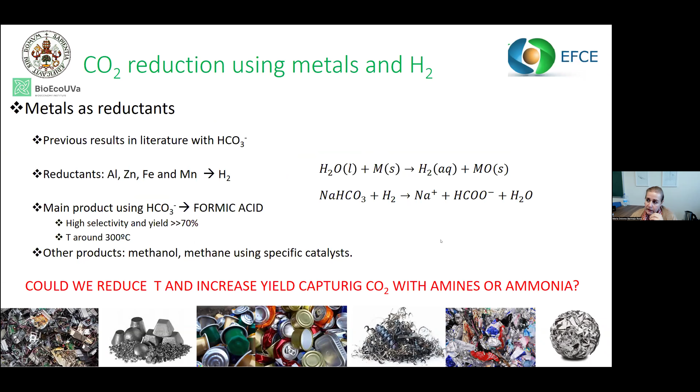So we thought if we capture this CO2 with amines or ammonia, we can have our aqueous solution more concentrated, and also this kind of bicarbonates of amines or ammonia are more reactive than sodium bicarbonate. We tested in batch, and we found that if we make the reaction with ammonium carbamate—which has an equilibrium with ammonium carbonate, and is the product of capturing CO2 with ammonia in aqueous solution—we have yields at 120. This means we have reduced the temperature a lot, to around 10, 20, 25%. And we realized that the pressure was very small.

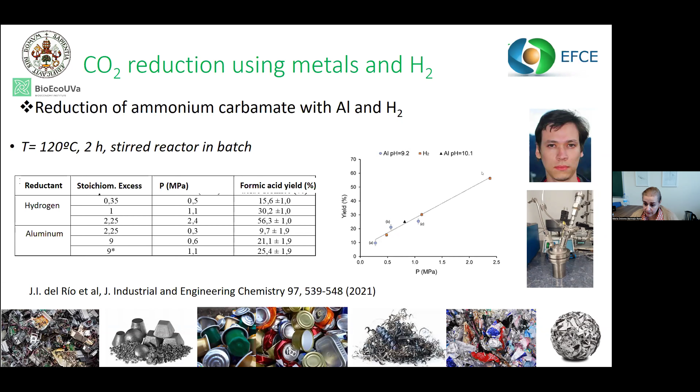This means that the hydrogen was not releasing from the metal using this solution of ammonia or ammonium carbamate. If instead of using the metals we inject directly hydrogen gas, we of course have higher pressure, and we have formic acid yields very high. The formic acid yield was directly dependent on pressure, on the amount of hydrogen.

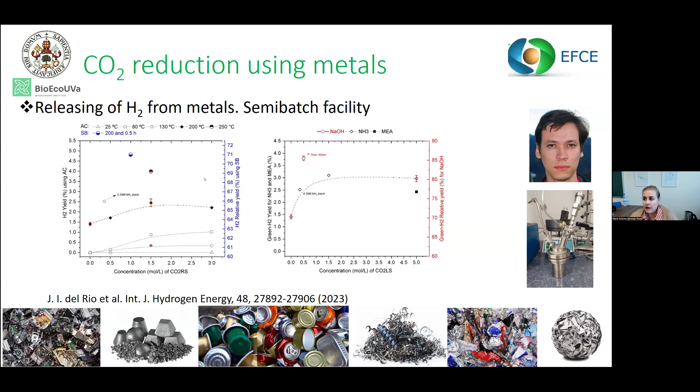So we studied the release of hydrogen from different metals using different basic solutions, both the original capturing solution of ammonia, sodium hydroxide, or amine, or the solution after capturing the CO2—meaning the bicarbonate or ammonium carbamate. We saw that this solution of ammonium carbamate of amine was giving yields of releasing hydrogen of around 3%, while the solution of direct sodium bicarbonate or sodium hydroxide was giving yields, in much less time, of 70%, 80% of releasing hydrogen.

So we know that we cannot make this process with metals. We have to use gaseous hydrogen. But this can be an advantage because it's easier to manage than the metals—we don't have a metallic oxide after the process—and also it is expected that in the future we will have enormous availability of green hydrogen.

So we continue our experiments. We test a lot of amines.

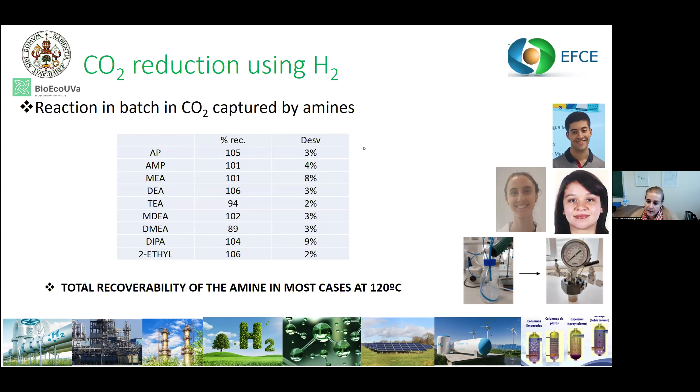Results of very good conversion of formic acid at 70 degrees and moderate pressure of 75 bars. So still these results can be optimized, these are only preliminary studies. And with these results, we also check that the amines could be mostly recovered. So we made NMR analysis of the initial solution and of the final solution, and we could see that the amine was recovered.

So the process was very promising, and we had funding from the Spanish government to make a pilot facility of 1 liter per hour of aqueous solution.

We are thinking of working with 30% in weight of amine, and this could be 90 grams of CO2 per hour. The amines will be absorbed at atmospheric pressure, and then the water solution will be compressed and reduced with hydrogen. We have availability of an electrolyzer.

We still don't have solar plates, but it could be working with electricity from solar plates. And then after the reaction, we will have the formic acid. We will implement a system for recovering and recirculating the amine by membranes or by distillation.

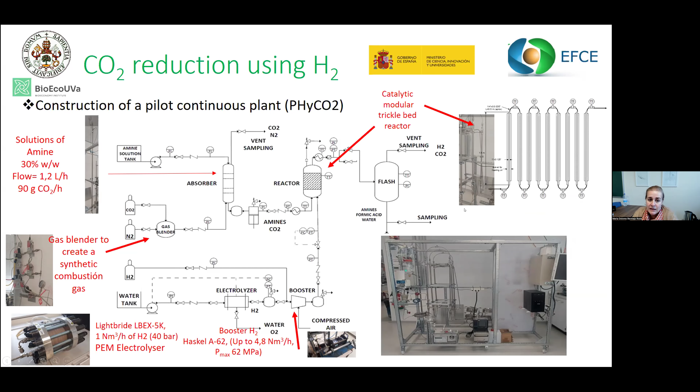This is in process. We have a photo of the current state of the facility, and we still have 3 more years to develop this project.

As a conclusion, the integration of CO2 capture in basic solution and reduction of CO2 in this media can be a powerful combination to mitigate CO2 problems.

It is possible to have the simultaneous conversion of biomass and CO2 in hydrothermal media and in semi-batch, and that combining temperatures and extraction times, we can have some fractionation of the products.

That is the process of reduction of CO2 with metals. When the CO2 is as bicarbonate, it's promising, but when we are using solutions of amines or ammonia, the release of H2 is hindered, and we have to use green hydrogen.

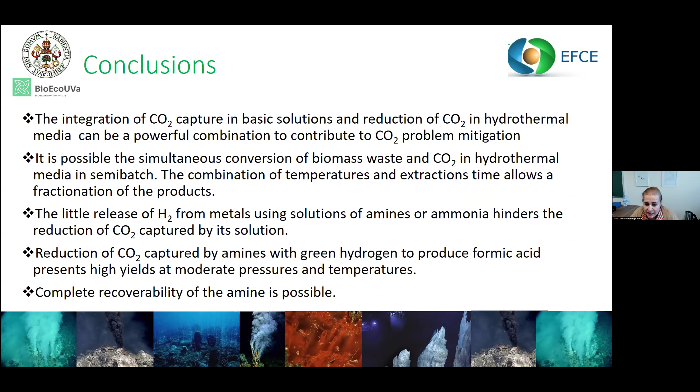But with this green hydrogen, we could produce formic acid in high yields at moderate pressure and temperatures. And we have a complete recoverability of the amines.